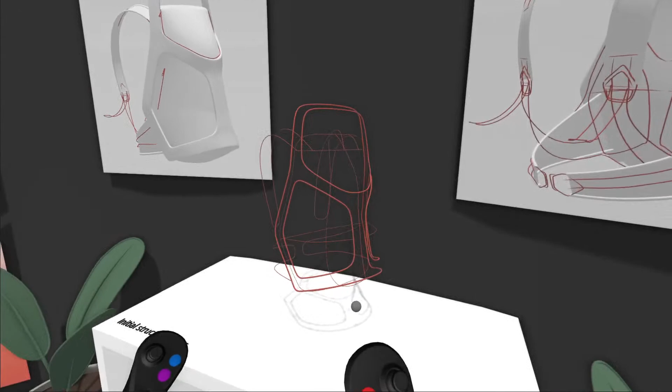Maybe I can explain how I came to this, how I translated the sketch into this. Usually what I do is just draw over the sketch. Let me pick another color here that will be more visible. Essentially what I did is I used this stroke tool in points, and then I translated this basic shape to get the right angle and everything.

Once this was done, I took the shape out and started playing with the points. If you go into edit mode, you can start shifting those points around. I did small adjustments to really tweak it in and create this final form and shape, and started building it in 3D. Then you can start expanding to the other side using the mirror tool as well, to create the final shape.

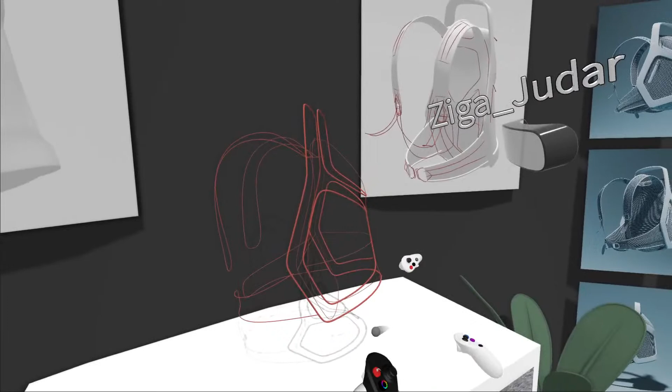Then I just started building in all the rest of the lines. If we move back here to the wireframe model, you can see all the different lines that I built out to give a sense of shape and form and to see how the volume would look like. Then I started looking at some details where there might be some issues.

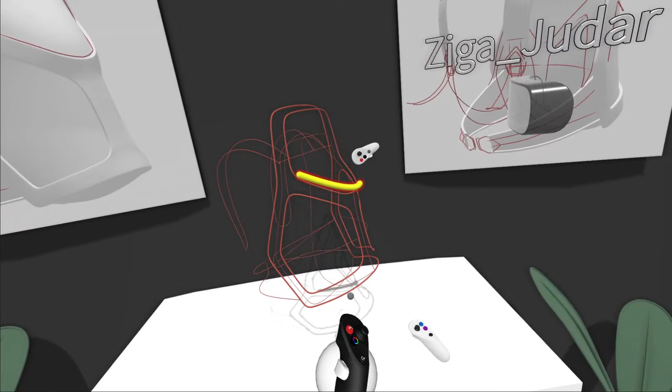What I ran into is, you can see this triangular shape here on the top, just a sec, like this. So the issue here was that the triangular shape on the top also translated to the bottom here. I had to get rid of this and work around it. I started pulling the shapes out a bit more and seeing how this would all look like in the end.

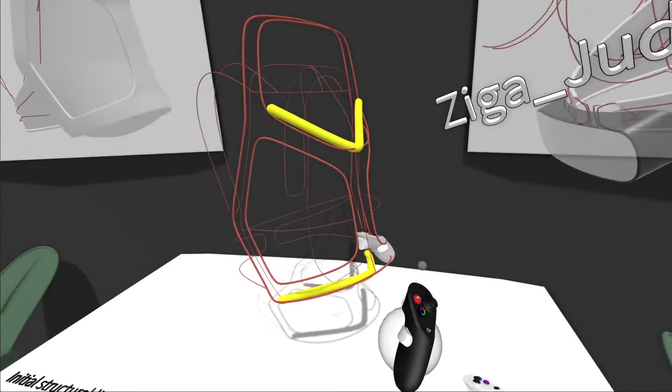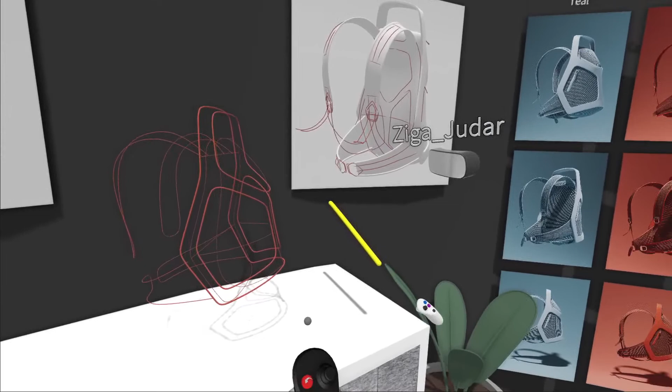Also, with the mannequin, I helped myself out to give a sense of scale and proportion, because that's also quite difficult in VR, to have a feeling of how long, for example, this line here is. It's hard to get a feeling for it. There is a measure tool, which I learned about later when I already started building the backpack. But I helped myself with the mannequin that's inside the program. That was an interesting thing that I learned.

After this wireframe, I started blocking in some shapes using the primitive shapes. Here you can select a square. What I did was build a square here on the top. Let me go into edit mode. I converted it to sub-D, and then started pulling this shape out just to get the frame built in a rough shape.

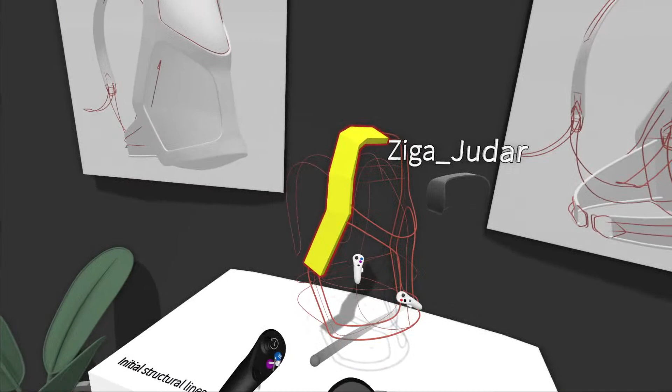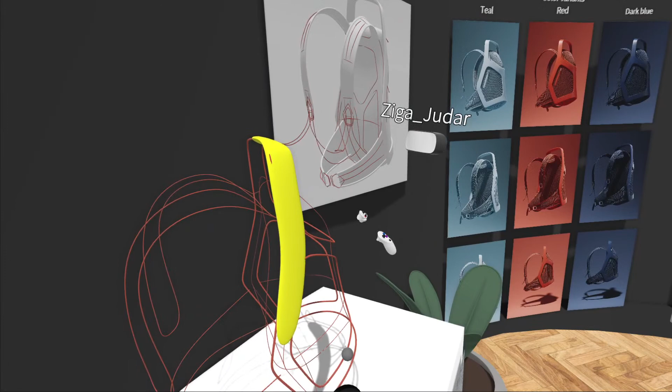What's great about sub-D, which I really love, is something I wasn't used to in traditional modeling or NURBS modeling. In sub-D, you can just hit a button and everything turns smooth. That was really amazing. Before, for example in Rhino, you had to define the shapes and different surfaces, make them tangent, and look at the curvature of the forms. But here you just push a button and the organic shape just comes into place.

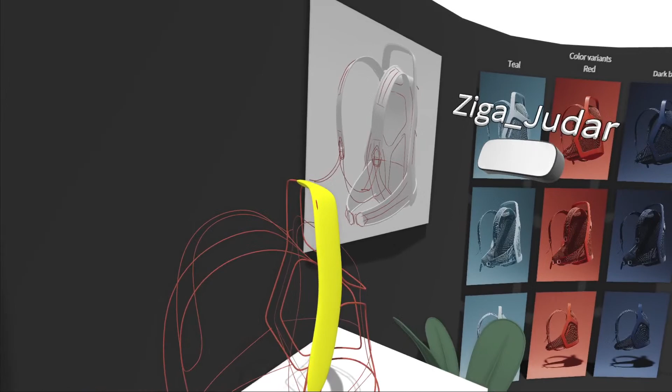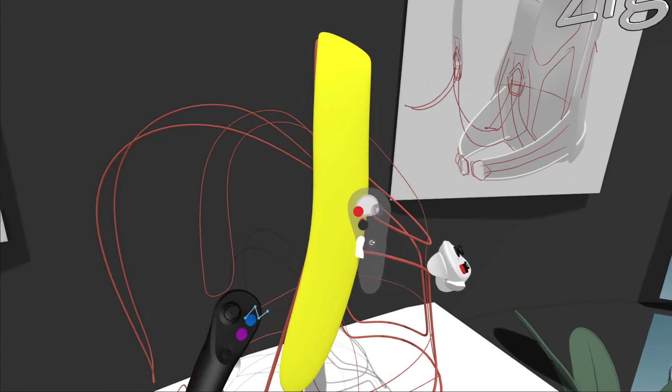This really helped with building out the frame and the organic shape of the backpack. I actually can't imagine how I would do this in Rhino, or I mean I could imagine, but it would take me much longer. Gravity Sketch really allowed me to play with the form, pull it out a bit or in depending on my liking, and that's how I started building the backpack.

Of course, then I build off of that. For example, for the fabric pieces, I used this surface tool, again in point mode, which was great. You already extended the frame a bit. For the surface here, I just used the point mode. Wait, just a sec.

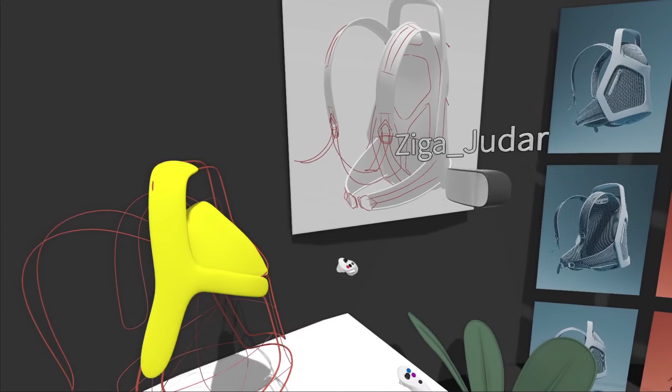And just roughly sort of build how this shape could look like, just to get a feeling for the shape. Converting it to sub D then allows you to put more points in, and selecting all of those points can then help with adjusting the shape to your liking. So that's how I built the fabric pieces, also the straps and all the other details, and then came to the final product that you can see here on the left. I think that's roughly explaining how I made it.

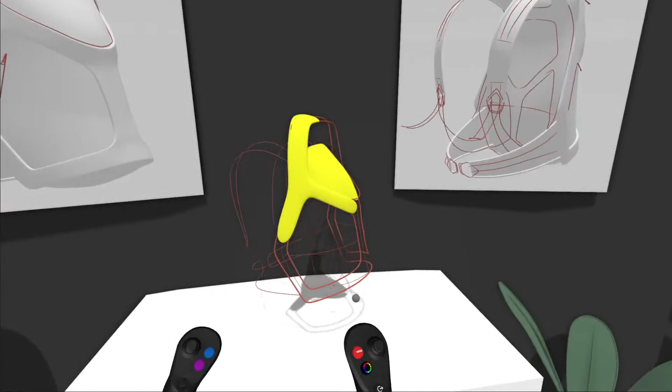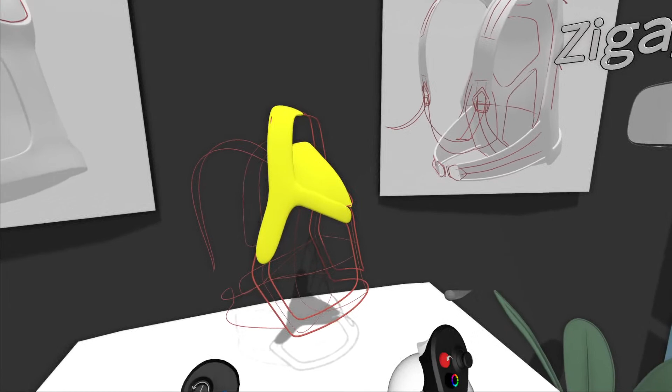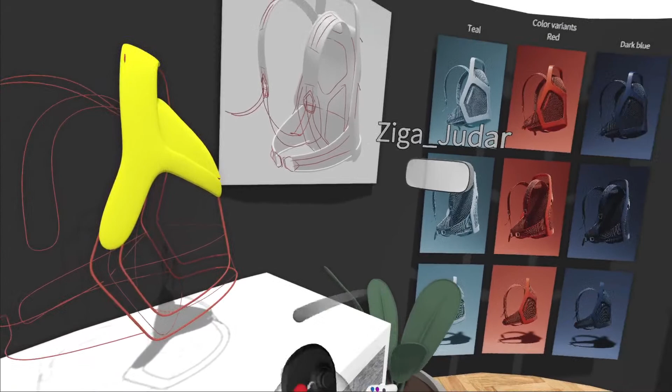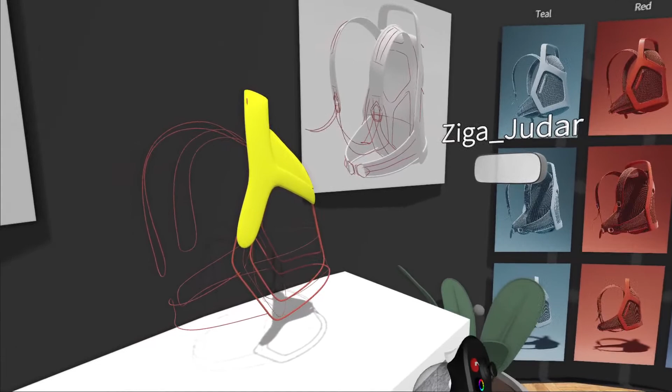But that was a great explanation, and this was the feedback from the judges when you were giving the presentation, which is it's such a simple shape, but it's deceptively simple. I feel like it's so elegant, and you really could add attachments to this if you wanted, and have iterations of this that have more of a modular sort of evolution to it. But the actual modeling of it was a pretty simple process. I think what made your design really stand out was the really unique shape, and the elegant simplicity of it.

And one thing we didn't quite get into was your inspiration, which was from Herman Miller. If you want to just maybe briefly talk about why you chose Herman Miller as your inspiration for this bag.

So let's jump this quickly to this image. One of the key insights that I gathered from my research when I was thinking about how to design this backpack was—I discussed this topic with a few of my friends who are hikers, and the main insight I gathered from them is that they want something lightweight that doesn't get in the way of their movement. And I started thinking, okay, what can this be, or how can I achieve this lightweightness and great form?

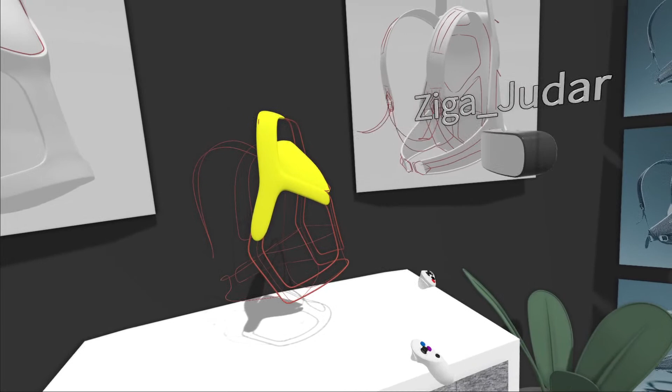One more thing to mention is you can see this frame is really complex and has some hard surfacing, so that was something I took a lot of time on. If we go back to the backpack—all of these transitions between the shapes, I spent a lot of time figuring out how to make the surfaces and transitions look nice. Because when you get into the final renders, especially these points and so on, they would show up quite badly if they weren't built properly. So nailing those down was really the key point here.

But we were discussing with the judges, and they gave me feedback about the frame as well, and how to take it up a notch with some other details and surface adjustments. I'm actually planning to do this in the upcoming weeks. So I'll post this on my Instagram channel, and if anybody's interested, they can follow along and see how this thing will evolve.

We do have one question that came through, and this is something I was actually wondering about myself—how long did it take you to create the model for the bag, and how many iterations did you go through before you arrived at this particular design?

Okay, so as you can see, not a lot of things have changed from the original sketch. What I did was mostly play around with the frame to really get the shape right, and I took more time to detail the straps and how this connects to the frame.

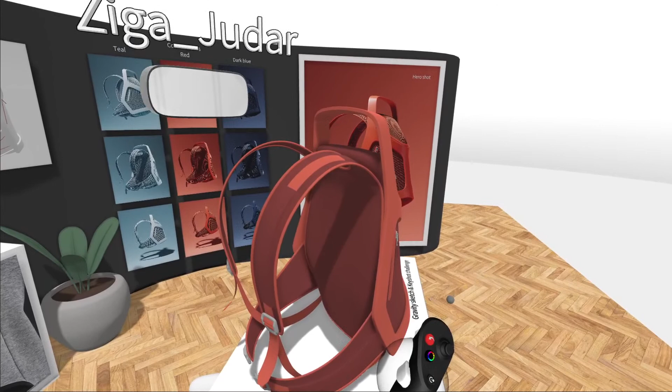Yeah, so as I mentioned before, the judges gave some really great feedback on how to improve the design. For example, if we swivel around to the front, currently I have the zipper here on the front, but when we had the final presentation, me and the judges discussed an idea where this backpack would open up like this as a clamshell. I think that's an idea I want to explore further, but that does limit this stretch fabric in the back that actually acts as a supporting piece, so I have to give more thought into that. I want to incorporate those details and ideate further. Now that I won the contest and have access to Gravity Sketch, and I got the VR headset as well, I can use Gravity Sketch more to ideate further and build on the details.

I just want to jump back to these renderings too, because I really enjoy looking at them - they're just so clean and pristine. Thank you. So obviously you've had experience with KeyShot before the challenge.

How long have you been using KeyShot? Was that introduced during your education or during your time in school? In architecture, we used ArchiCAD, which is an architectural version of AutoCAD. It's easier to build models there because you have the doors and everything sort of in place, and we also rendered in that program. That was a really bad rendering program because you couldn't get nice results out of it - at least during my time with it, I couldn't find good tutorials. Then when I started studying in Austria, that's when I got introduced to KeyShot, about 2 years ago. From that, I fell in love instantly with what KeyShot offers and what you can do in it.